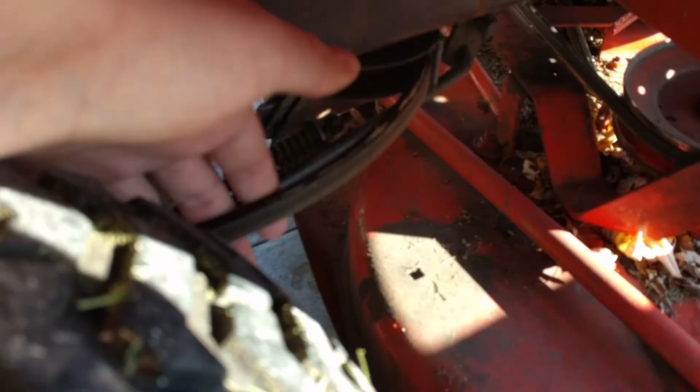This is like from the early 70s, I believe. He had a manual and everything with it. He says it just needs a tune-up and new belts. Let me see if I can get a shot for you guys, back in here, see that? His belt at the back kept coming off, so that shouldn't be that bad of an issue. And he's had his deck welded and repaired, so it rotted out at some point.

There's grease all over it, definitely in need of a wash and degrease. But yeah, I'll get this off the trailer and bring it to the back. So this thing's not bad. It's an old one, but it's in real good condition for how old it is, and it's not completely rotted out.

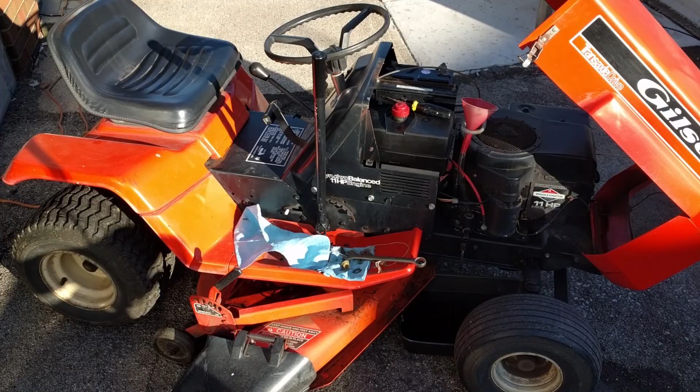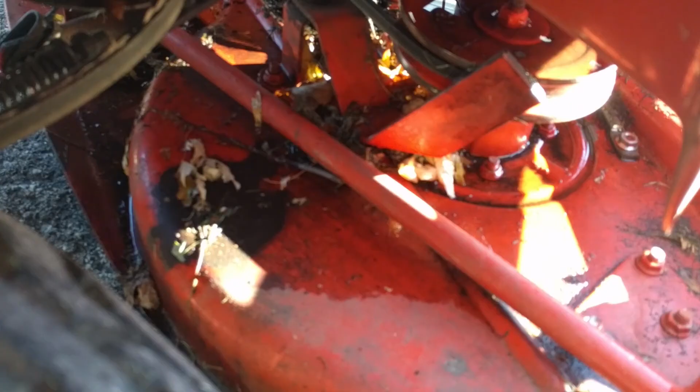So just got to do belts, tune up, oil change, probably a carb clean, you know, just the same old. We're out here working on the Gilson. We washed it, had to degrease it because there was a ton of grease all over the engine. After we washed it, we fired it up, let the oil get warm, and now we're draining it. This one doesn't have a dipstick, so you can see we're using a funnel with a clear tube. We're going to be putting 10W30 into it. We still got to take the deck off. We'll probably end up inspecting his deck, and we got to take that off anyways to change the drive belt.

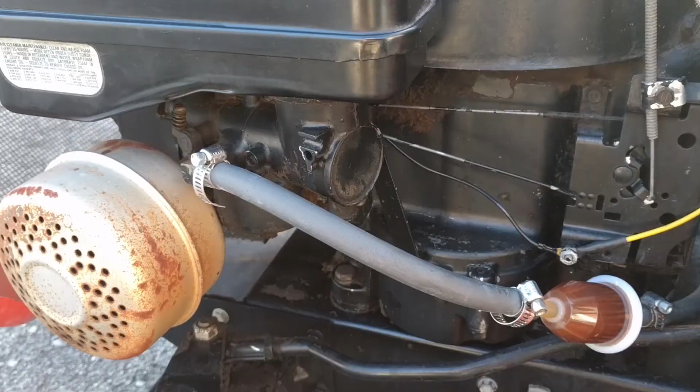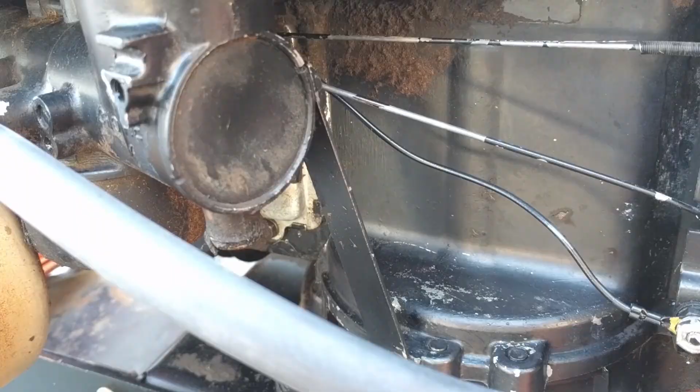We had the battery on charge last night just to top it off. Our customer was saying he had to hold the choke to fire it up, but when we did it after we washed it, mind you, it fired up fine. You shut the choke off and everything's fine, you don't have to actually hold it. So what I think happened was all this linkage here, because there was so much grease built up on it, it might have actually been holding his choke in the open position. So when he went to start it, he wasn't able to choke it, and he had to hold it. But when we went to fire it right up, we haven't cleaned the carb or anything in it, and it fired up.

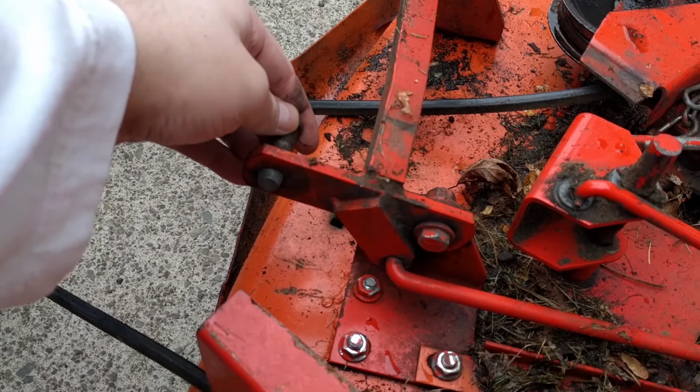So we got this washed up, but I just got to take the deck off. Okay, so I got the deck off. It wasn't that hard, I just had to pull a couple cotter pins. There was a cotter pin back there. Oh yeah, this chain here, that sets your deck height, and yeah, I think that was it. And then the two at the front here, this little hanger, and then these just go through, then you put a cotter pin on that.

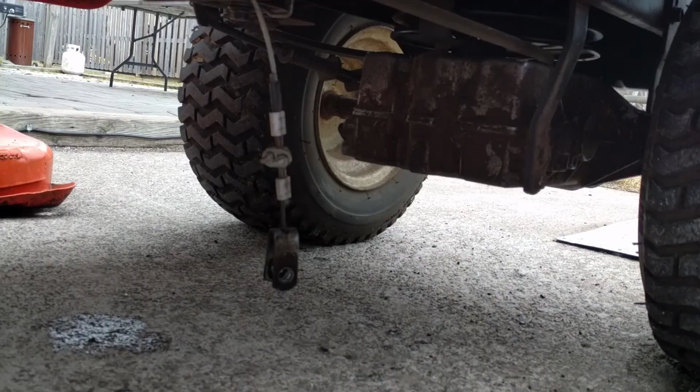So the deck's off, I just use this little, it's like a patio chair thing. We got her set up here on the concrete so it's nice flat level ground, because you want to make sure when you're putting a deck back on that you have your lawnmower on level ground. But this is the underside of it, and then there's your front hookups there, and I didn't even have to take off the belt guard, the belt just slipped right off.

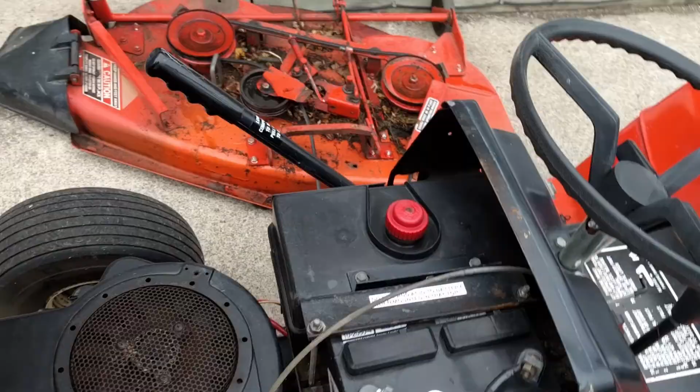This is a 1970s model. Like I said guys, this orange paint, that's all original paint. Look at this thing, you look at that Husqvarna snowblower, it's unbelievable, paint's already stripping off of it. So your fuel tank and your battery are all at the front here. Like I said, we degreased the engine, now I can hose this down. The deck belt is fine, but it's the drive belt that needs to be replaced.

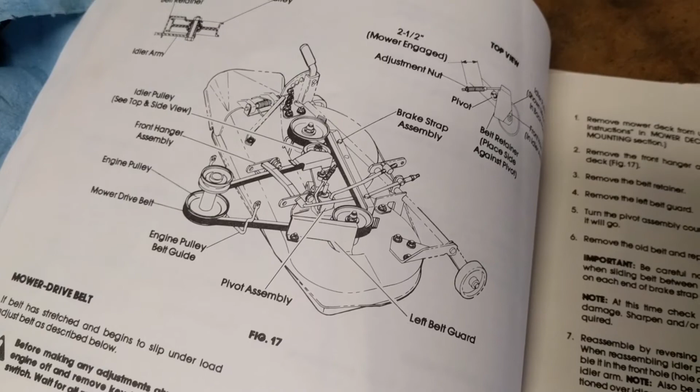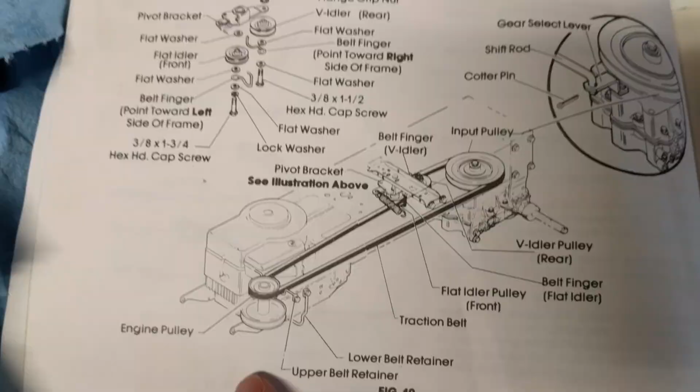I figured a good time to talk about manuals. Customer had an original manual for the Gilson. You flip into this stuff, you can see everything, all your part numbers, illustrated diagrams. This is what we're going to be changing right here. Way easier to show you guys on a manual than it is on the actual machine, because it's upside down and whatnot. Yeah, his belt, as I showed you in the clip, it's slipping off here, and it's underneath the pulley here.

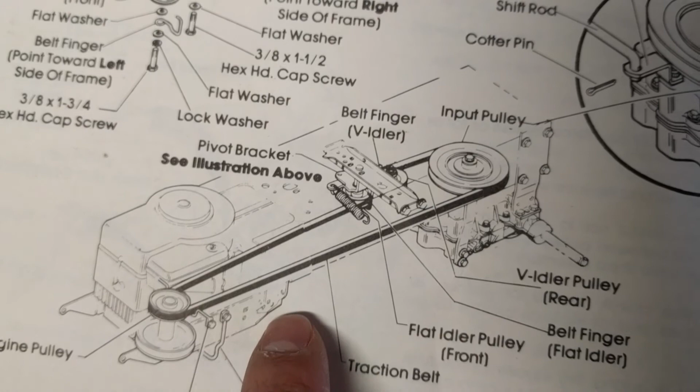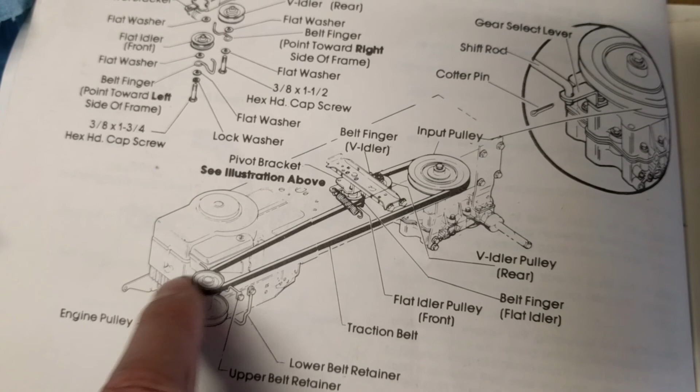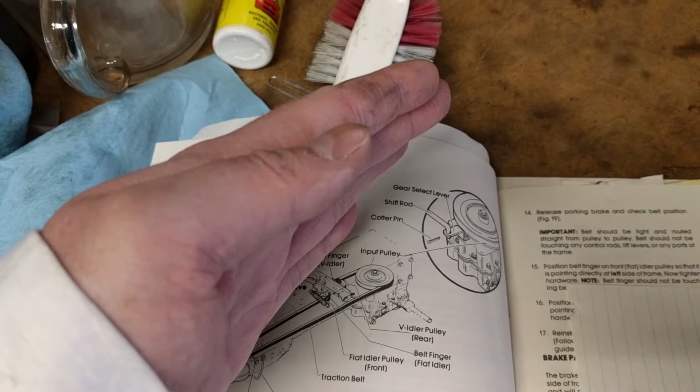A lot of times this spring falls off, so you won't have the proper tension, and you'll end up getting slack on your belt, and then you'll go to engage it and it'll just slip off. Basically, your engine starts up, this pulley and the stack pulley are always spinning with the revolutions of the engine. So you don't want your machine driving all the time, so they put this little idler pulley in here. When you engage your drive, those two pulleys go like this and put tension on the belt, and that tightens everything up and transfers power from your engine back to your transaxle.

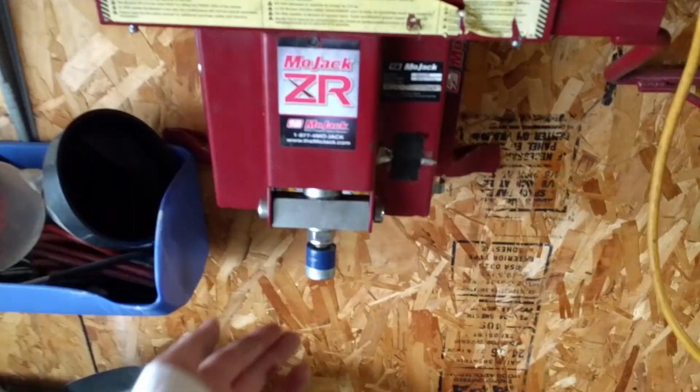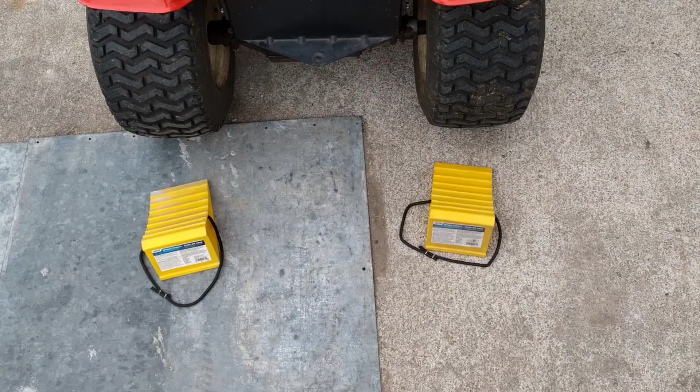Now that the deck's off, we're going to grab our MoJack. This thing lifts up the front of the machine. Your tires go in here, you take an impact to here, there's a threaded rod, and it lifts that up. So we'll lift up the machine and take a look at that drive belt. You just lay that thing out, roll your machine onto it. They give you a hand crank to tighten it up and lift it, but it takes forever, so we just use an impact, works way better. So we'll get this thing jacked up. Also, make sure when you're using a MoJack, you want to chock your back wheels—that's these things right here, wheel chocks. Stick those in so your machine won't roll back.

So now we got the new drive belt. We can get that onto the machine and finish up the Gilson, get that back to our customer.

He's the same guy that's going to be buying the Husqvarna snowblower for his son, who's in the armed forces out in New Brunswick. I think his son's going to be coming down, he'll load it into a truck and take it back with him when he goes. He says they got all kinds of snow up there still.

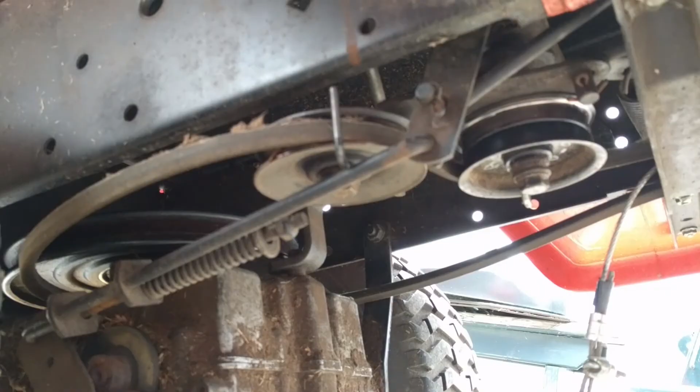So this is what we're looking at. Right there, that's the pulley system, and the belt came off, so this is the belt we got to replace. There's our spring right there, that goes over to our idler here. It looks like the spring's good—it looks like his belt just kept slipping off. So I'll go ahead and probably pull one of these pulleys off so I can start pulling this belt off.

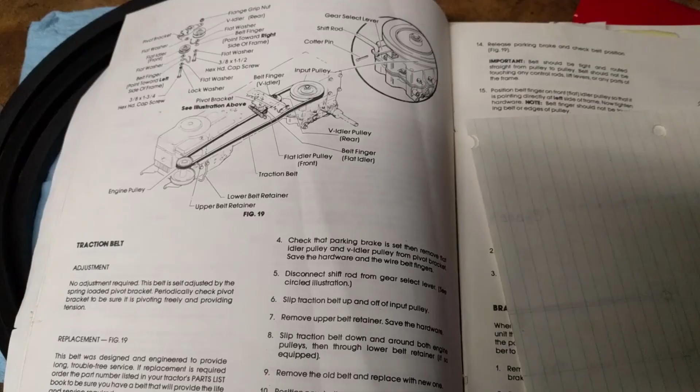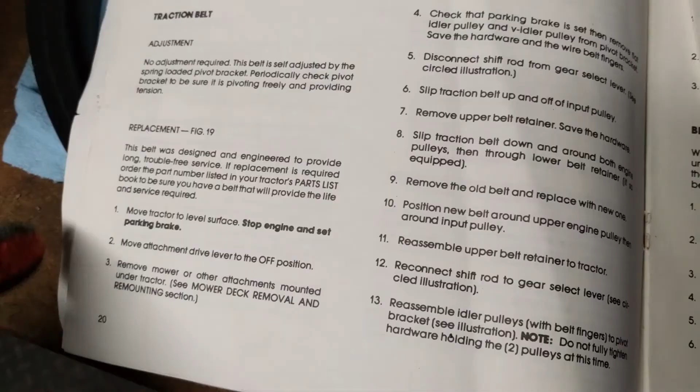Okay, so we're looking at the traction belt and we're looking at replacement. Most of the time we don't have a manual, so I just look at what I have to remove and go ahead and remove it. We already got the deck off and everything, so we're on number 5 here.

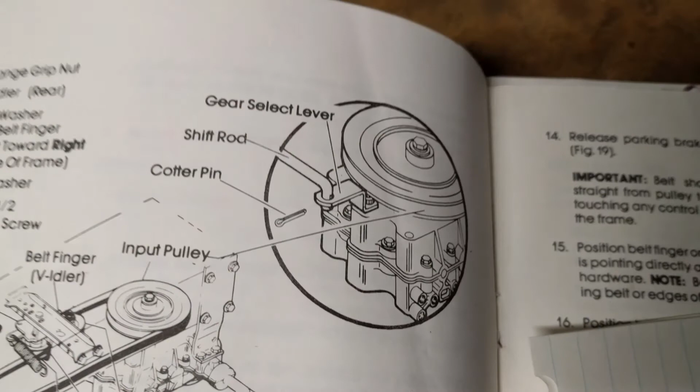Disconnect shift rod from gear select lever, see circled illustration. So that's right there—at the back of the mower, here's your shifter to your transaxle. We're going to remove the shift rod, pull out the cotter pin, and that will allow us to get the belt off of the rear of the machine.

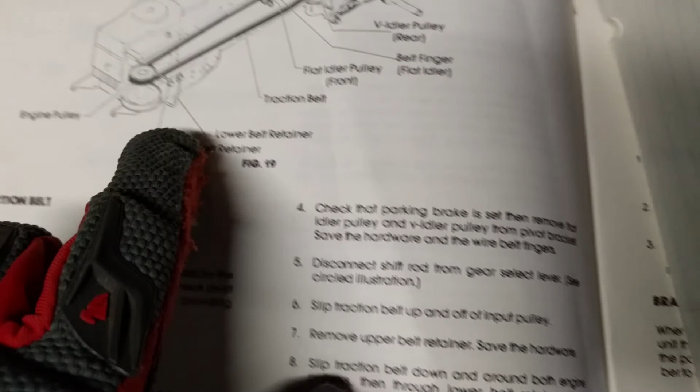Then it goes on to say, slip traction belt up, remove upper belt retainer. So that's going to be something like up here, I'm guessing—retainer, either at the front or the back of the machine. It's basically straightforward, but there's your steps there.

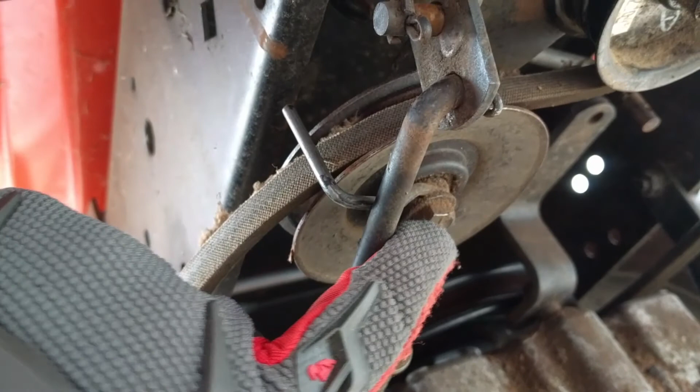So there's your shifter linkage right there, and you want to pop the cotter pin out. Now we can hopefully get the belt off of the back of this, then we'll route it through. We're going to have to loosen this up to get these retainers off. Again, loosen this up to get that retainer off too, and go ahead and pull that off.

If you guys want to see how one of these works, I'm just going to use a ratchet here with a 9/16 socket on it, just to push it and give it a little bit of tension. So that's spring loaded back here. When you put your machine in neutral, it goes like this so there's slack on your belt, and then you put your foot on the throttle and it tightens it up like that.

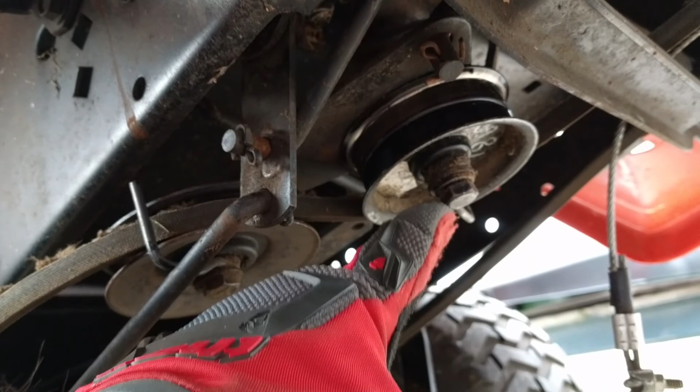So he was having an issue where it was slipping off either at the back or the front, but those are called keepers right here, and over there there's one as well—those little rods keep the belt on the pulley. Yeah, this should be easy. I'm just taking it, like I said, 9/16, going to remove this so that I can pop the keepers off so that I can get the belt out.

So anyways, I took off these little keepers here, just loosened it. I didn't take the pulley right off, then you can kind of push it in like this. We got the belt hanging down here now, and we're gonna go ahead and push it off the front and take that off. To do that, I'm probably gonna have to take this bar off. That's your keeper, right? That keeps it onto the pulley.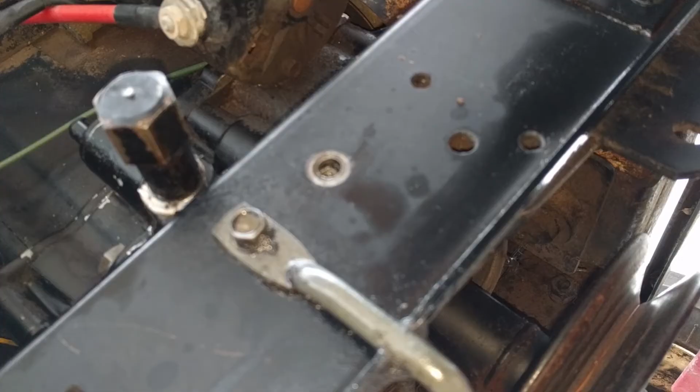See that hole right there? That's a 3/8 bolt that goes in there, and that goes to the rod right there. And then again, there's a 3/8 bolt on the other side, and we got to get this belt keeper off so I can pull the belt down over top of this big pulley, then we'll slip it out underneath the larger belt keeper so we don't have to take that one off. So again, 3/8 bolt on each side, pop out that keeper bar, and then we'll be able to slip our belt out. Okay, so we got the keeper out.

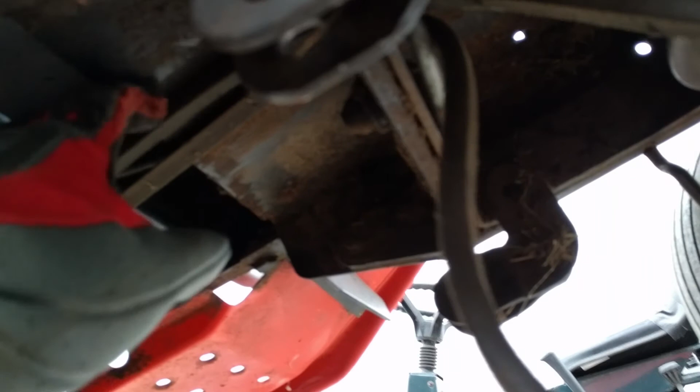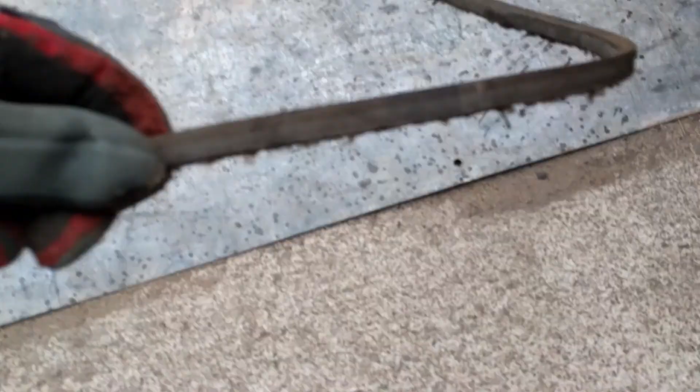You can see I just slid it back this way. Go ahead and wrap your belt over top of the pulley just like this and pull it out onto the one side, and then we'll pull it out of the frame here like so, and that's it. Sorry if the camera's a little shaky, guys, but I'm trying to do my best. Belt's off, it's starting to get chewed up and worn out on the edges. You can see it's starting to fray, but we got a brand new belt that we're gonna throw on there. That's it right there. Didn't take that long to take off.

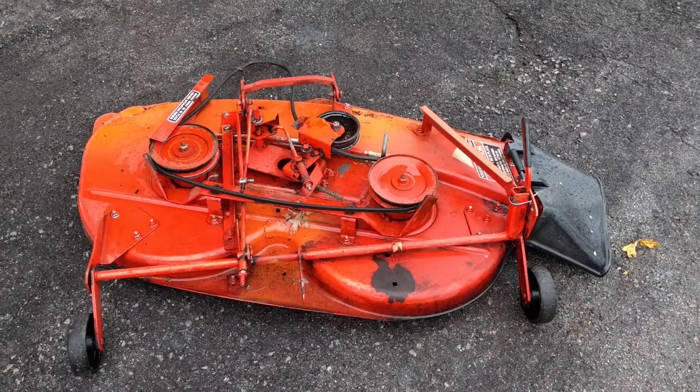The deck had to come off, but we washed that, took it out front. So here's the deck, and it looks brand new. A little bit of wear on it, but not bad. We just brought it out here to take the hose to it, just so you don't get leaves and dirt and mud stuck up in there, because that retains moisture and it'll end up rusting. So we don't want that.

We washed it, we'll flip it upside down, probably scrape it, and then we'll end up undercoating it and sharpening the blades. Do a full tune-up on it.

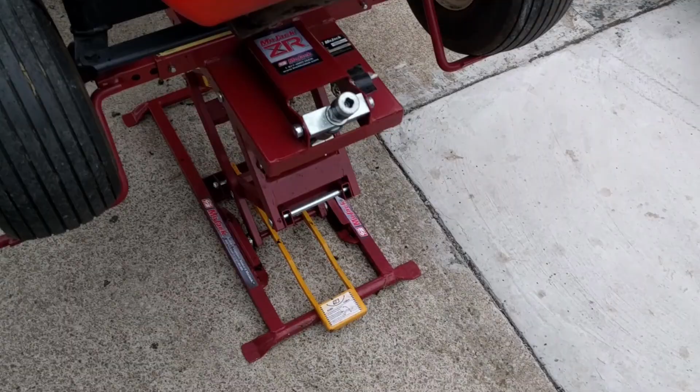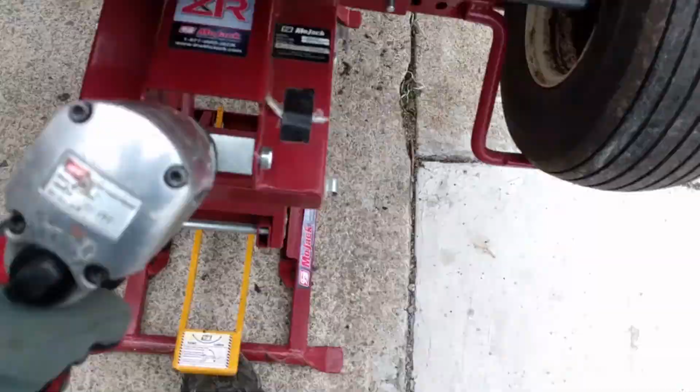So to lift it down, it's got these little locks here, so it doesn't collapse on you. All you do is put your foot up under here, then go the opposite way with your impact or your hand crank, and she lowers it down. Put your foot up underneath it. Now the higher your PSI, the faster this will go, but I don't like to max it out. Then once you get past the lockouts, you don't have to keep your foot up underneath it.

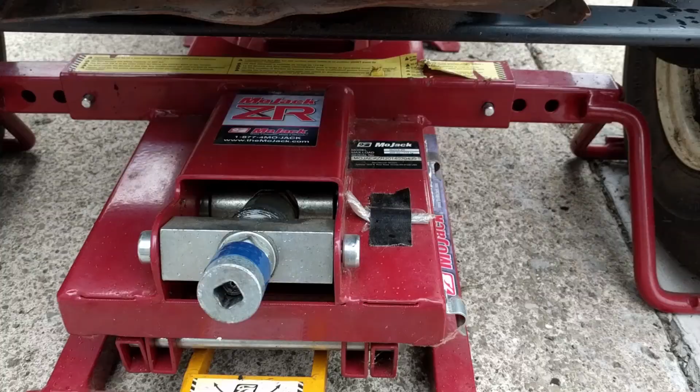I also forgot to add that these things are adjustable, so depending on how wide of a machine you got, you can just widen up your holders there for your tires. Comes right out. But as you guys can see, it's starting to rain, so we're packing it in.

Well, the rain completely ruined that. I was gonna get the belt on, but don't want to pull it into the garage because we're painting the rest of the Husqvarna and we don't really have that much room. Normally we don't leave machines outside other than that one because it's ours, but yeah, we got no room in our carport, that thing's filled, so basically she's just sitting here for now.

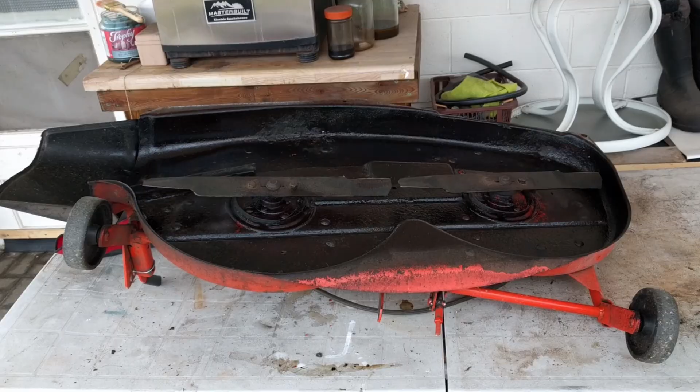We undercoated the deck, so when we washed it yesterday, we flipped it up underneath there, washed the top and the bottom. We sharpened the blades, you guys can see now they got a good cutting edge on them. We also undercoated it with a little bit of rust check. The deck shouldn't rust - he's had some issues where the deck's been patched and whatnot, but all in all, not bad, not bad at all.

So the deck's done. Deck belt was in good condition as well, so we didn't need to change that, just the drive belt. Just looking here at the new belt compared to the old belt - you can see the wear on the old one and the weathering.

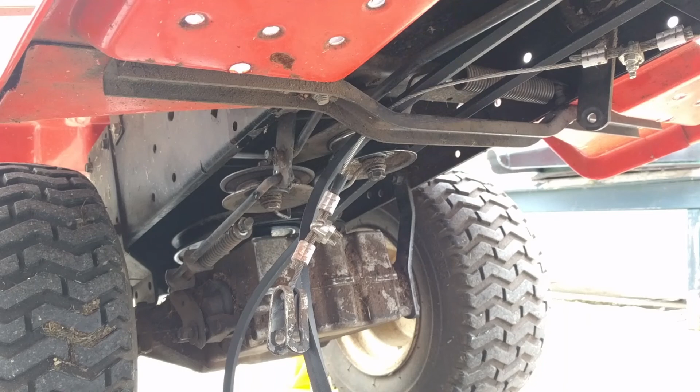Okay, so basically reverse of how we took it off. We're gonna take our belt like this. Make sure your cable here is on the inside like that.

We're gonna wrap it up here. You want to go inside of that right there, that rail. Then you're gonna do the opposite of what we did to take it off. You're gonna come right up here, wrap that up under your big pulley, and then put it to the top.

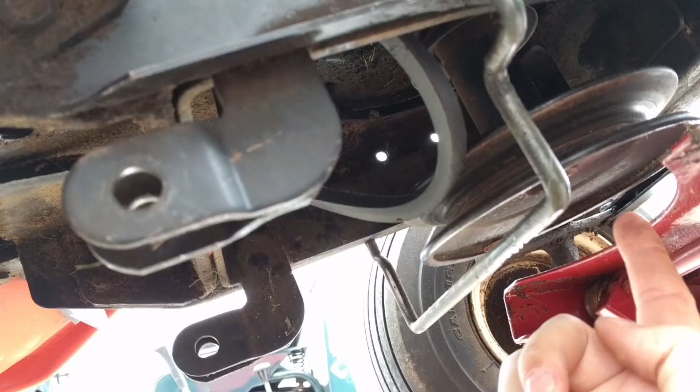Then we can go ahead and slide that keeper back up top and bolt it on using the 3/8 bolts right there. And then as for the back, once you got the front done, just take that, wrap it through here, and then I'll show you how to do it onto the pulleys.

Then you're gonna want to run your belt. Once you have the back of your belt going up that way, you want to run it to the inside of that pulley and then to the outside of this pulley. And to get it back there in the first place, remember we had to disconnect that shifter linkage right there? You're gonna go right there and you're gonna go up through that way, right to the back.

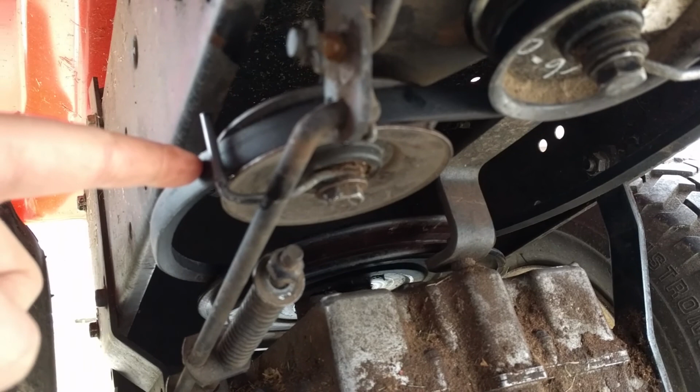Okay, now I've gone ahead and tightened up the nuts on our pulleys and the bolts there. Make sure that your keepers, your belt keepers, are in the same location as they were before.

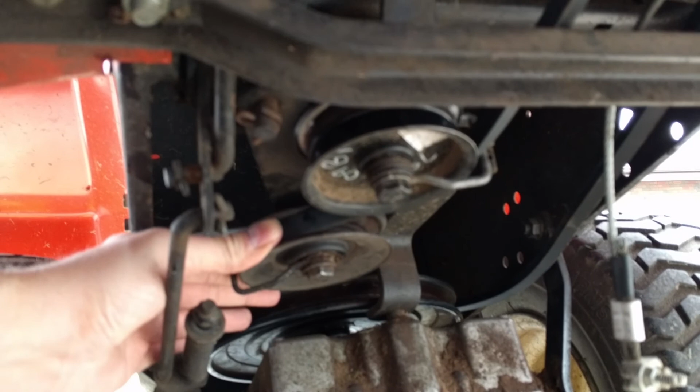Now comes the tricky part if you're doing this by yourself - you got to get the belt wrapped around onto the pulley at the back. But right now you can see that there's a lot of length taken out of the belt. So what we got to do is push this pulley to give us enough slack to wrap it back. But it's spring loaded.

So you can either get yourself something like a quick clamp, which I really don't recommend. Probably easier to have maybe somebody hold that. I could hold this while somebody else wraps it around. You could tie a rope on it. You could probably disconnect the spring, but I don't want to have to do that. I'm gonna get my old man to hold this like that, and he can wrap the belt around the pulley at the back. Then we can go ahead, reconnect our shifter linkage with a new cotter pin.

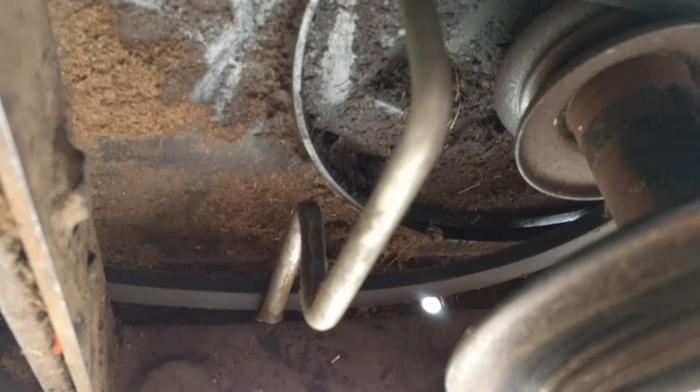Never reuse old cotter pins. Again, we put a new retaining clip there, and then once all that's done, the last thing that I'll do is I'll go ahead and bolt up our keeper for the front.

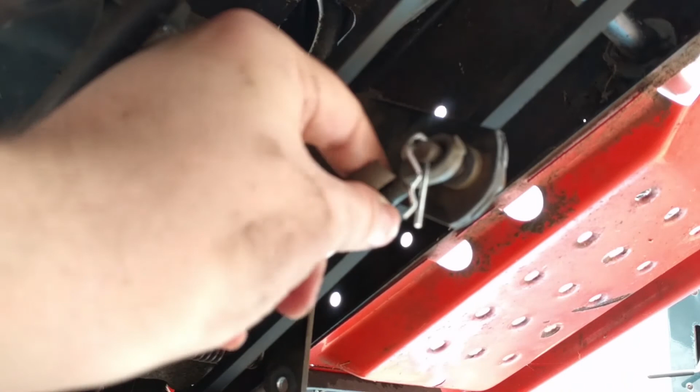Okay, so now we got our belt on. You can see that there's nice tension, it's nice and tight. You want to make sure that your belt goes on the outside of that. I had it wrapped in, but that's just because we were running the belt through and that's just how it got caught up. So I just disconnected this, pulled this off, and then wrapped the belt around that way.

So now what I'll do is I'll go ahead and get that keeper on. It comes all the way through like this, through this little bracket, to the inside of that pulley, to the outside of that one. You can see where my keepers are at. We went and put a new cotter pin on the shifter linkage, so that's all good. So yeah, I'll go ahead and get some 3/8 bolts onto there.

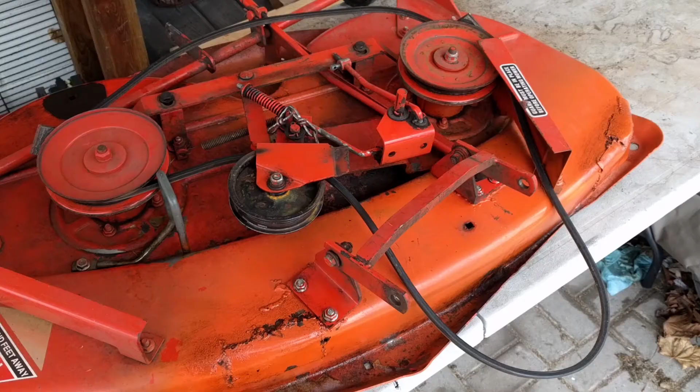Okay, we're ready to put the deck on. You got to remember that there's a chain, that's your hanger in the center of your machine, so I might end up grabbing a couple blocks like that maybe, just to set the deck up, because when this was on and the deck was in its lowest setting, this still had tension on it. So when I popped that off, the deck dropped.

So what we're gonna have to do is, again, set your deck to the lowest setting, and obviously I'm gonna have to drop this down and get the Mojack out of there and whatnot, but make sure your lawnmower's in its lowest setting. Then what we'll do is, like I said, I'll put some blocks underneath it, so I could go ahead and just put that on and pin it, and then we can go ahead and drop this down.

Then we can get our pins at the front in with clips. Then we can, because that's what sets your forward and back position, right? This is just a hanger, that just sets your height. So this is what sets your left and right and forward and back. So that'll line us up. Then we could go ahead, get this linkage here - that's for your blade engage. And then go ahead and get the one at the back.

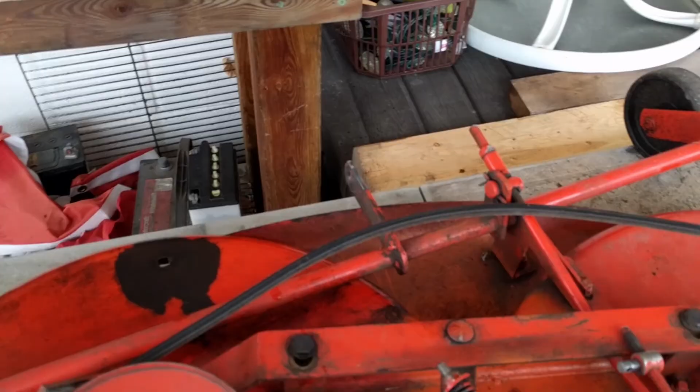And that's, by the looks of it, we got linkage coming back to here. That's just for your height. And that's it, 4 little connections. The 2 at the front, the 1 at the back, this one here, and then the 5th is the chain.

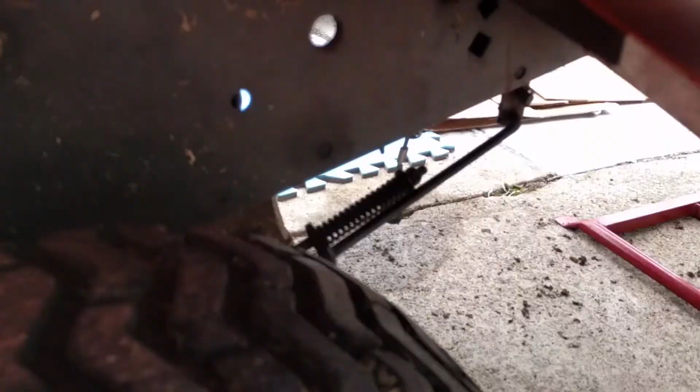I wanted to take this time to tell you that I'm going to drop it down. I'm going to fire it up because we changed the oil, so we got fresh oil into it. I'm going to take it for a spin, maybe just down the driveway or here in the backyard, go forward and back. I just want to make sure that the new belt on there doesn't slip off.

Right, because that's the problem he was having, the belt kept slipping off down there. So I want to run it before I put the deck on, because if I put the deck on and there's a problem, then we got to take the deck all the way back off again, and I don't like that kind of thing. So I was going to take it for a spin, but all the tires were flat.

So I had to put air in all of them. The back right here, the valve stem was leaking, so basically I just had to keep pressing it until it locked in. But I think he's got a slow leak on all 4 tires.

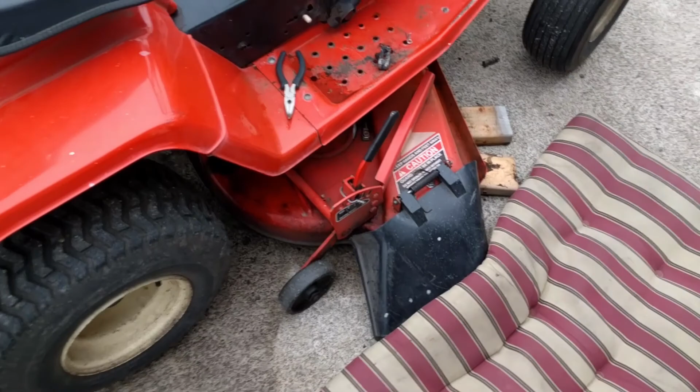Okay, we slid the deck under. You can see I got my mat here, so I'm not laying on the cold, damp concrete. We're gonna come up under here. See that chain? We're gonna hook our chain up. So you're gonna want to pull the pin that cable's attached to. Hook your chain up, and then put the pin back on.

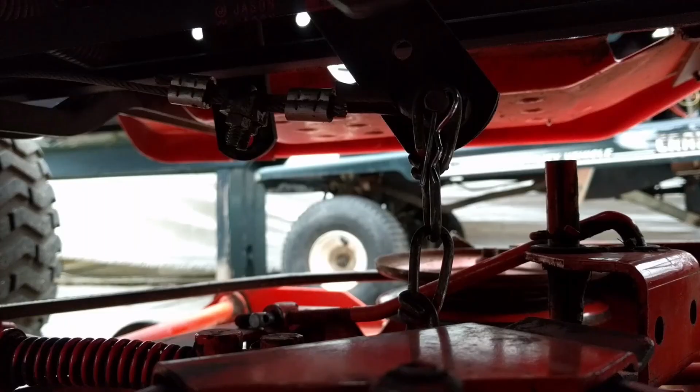So you can see that I just put a 2x4 on each side. Okay, so it's only lifted up 2 inches. That just gave me enough slack, enough slack for my chain there.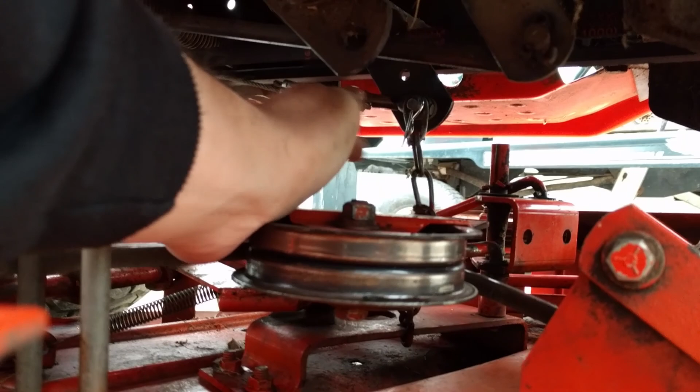So now I gotta get my cable at the back there hooked up with this little guy and that clip. Go ahead and get that onto the other side where the linkage is for the blade engage. Okay, now comes this part where you're going to want to take that metal clip over your cable and attach it to the back there, and then we'll go ahead and put our bolt through with our cotter pin right there. Okay, we got our cotter pin in, so now I'm going to move on to that guy right over there.

Okay, so now that we got that guy on with the clip, we'll go ahead and put the belt onto the front pulley, and then we'll hook up these guys right here with those pins up front.

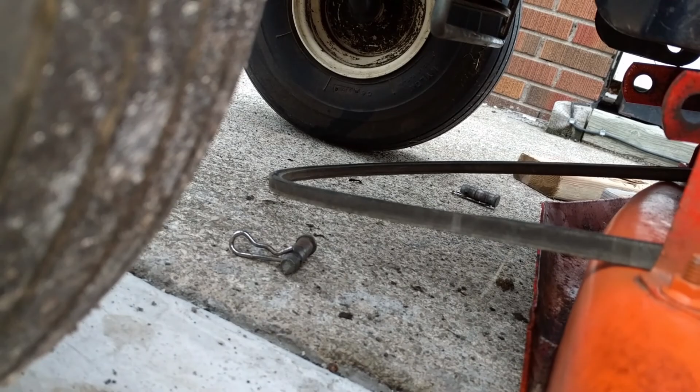I screwed up, guys. I never ended up getting a clip of the Gilson running and driving and whatnot. I think it started raining and we ended up shutting it down for the night, and then we ended up going and delivering it to our buddy Trent there the next morning, and I kind of spaced, never thought to get a clip of it. Yeah, sorry about that, but all in all, it ran good.

Before I even put the deck on, I went and took it for a spin. I wanted to make sure that it drove and that the new belt didn't slip off. Yeah, other than that, it ran good, fired up.

So the issue with him having to reach down to the engine every time he had to start it, basically what I think is that a little bit of grease, a little bit of mud and dirt stuck onto that choke lever there, and wouldn't actually allow him to engage it when he throttled his machine up to the start position. So now all he does is throttle it up, hold the safety switch over to the start position, turns the key, fires right up. He can go ahead and throttle it down, and it ran great, it fired up great. He'll probably have to put some new fuel into it because it's been sitting for a while.